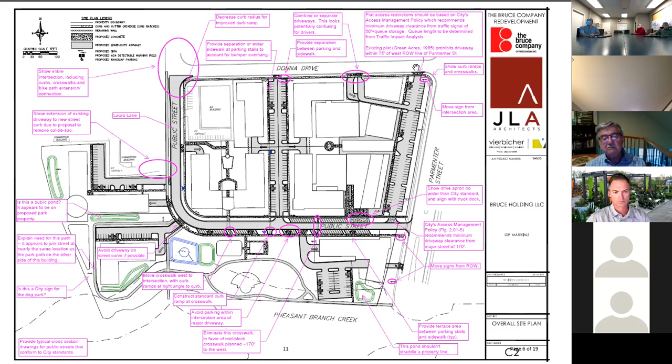It is a GDP. Only an SIP approval would guarantee them. So the only thing being approved is the density, the zoning, and the plat. It is not these level of details. So even if we show them, it doesn't mean they're guaranteed for the development, because you have another kick at the cat when we come up for the SIP.

Maybe I was misunderstanding earlier - I thought Seth said that it's critical that it be right here, wherever it is existing today is where they want to keep it. We wanted to confirm what your concern is, which is that it's drawn in the location shown, in the actual location. We do want to confirm that for you.

So I kind of feel like I'm hearing two things. I feel like I'm hearing we're going to put it where it is, regardless of whether it conforms to the platted access restriction, and we're not worried about that right now - let's push that down the road to the SIP. That is correct. Sean, for clarity, could you go up to the existing conditions drawing? That might show it.

That shows the point, yeah, it sure does, here, right? And on the next drawing, so here - yeah, we should get Vierbicher to correct that. That's a good catch, because it should be shown on the plans exactly where it is today.

Can you show side by side, Sean? Are you able to do that? I don't know that I can pull up two of them at the same time. I don't know either.

Well, we'll double check. As I said, we'll make sure that gets fixed on the drawing. Yeah, that's totally different. Yeah, different scale, but it looks different.

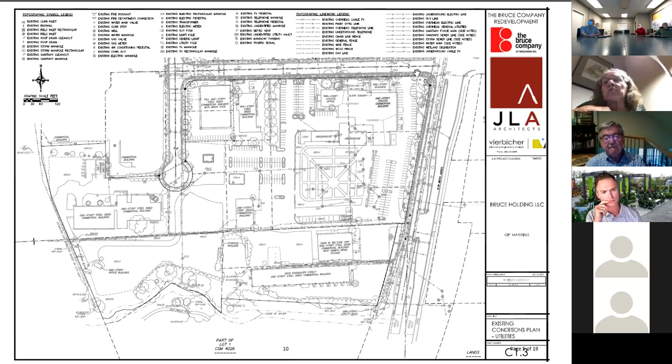That would make it even more problematic with my question - that would be problematic today if it were, as the scheme, the future plan is. Well, it's got to go back into that location you see right there where the hand is, which means the new drawing is not correct, we need to get that fixed, which affects the buildings, actually. Those are buildings there - the building shape will have to change.

Okay, and all I'm saying is, and it sounds like you're agreeing, good catch. The TIA is going to inform further what's the operational effect of this land use change without... Yes, yeah, so that's it. We'll get that fixed, that's a good catch.

All right, let's move on here, we still have a lot of ground to cover. So then I requested showing curb ramps and crosswalks, that kind of thing, just so we know where pedestrian connections are, near the sign intersection area. That'll take a later package, but I did want to bring it up now.

Can you go back to the other drawing, Sean, to see? Let's just - okay, you see the sign there? I think it's that dark bar, horizontal bar. It's difficult for me to tell. Right there, right there. I think that's it. Seth, is that it?

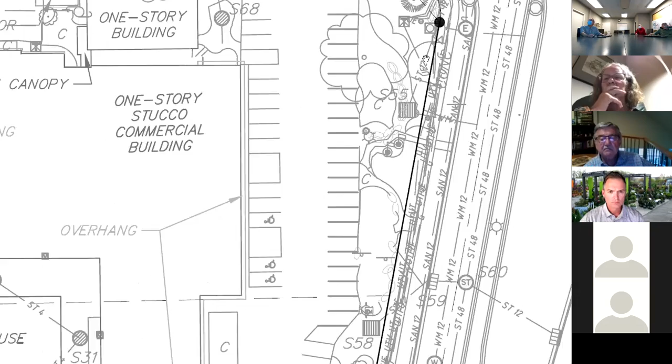Seth? Yeah, I'm trying to determine which one that consists of. I don't know, none of those look very sign-like. I think these are the pillars for the fence that goes around. Well, we should get the sign - why didn't they show the sign on the survey?

Well, Jake, let's make a note, let's get that on the survey, and make sure it's in the location that it is today. I think the main sign is here. Right, correct, the main sign is right where your hand is. So I want to make sure we determine what that other sign consists of, but our main sign is where your hand is.

Okay, and I think you've got the decorative fencing around this corner. Yeah, all right, we'll figure that out. Anyway, so the next one down, just kind of working clockwise, is to show a driveway apron no wider than city standard and to align it with the truck dock.

This looks to me like a truck dock over here. Yes, that is correct. So Sean, our question there for you is the trucks are going to be pulling east on that street, right? And then backing in at an angle, right? So how much apron are they allowed to have in order to back in at an angle? You kind of know what I mean?

Well, that's harder for me to say. I don't know what this truck dock use is. It seems a potential source of conflict to have someone backing out of an angled parking stall and a truck sliding in sideways and people using this driveway in this intersection, all within 150 feet. So I had some concern with, frankly, the width of this driveway looks really commercial/industrial. But if it's also a heavy pedestrian area, that's a pretty big conflict zone.

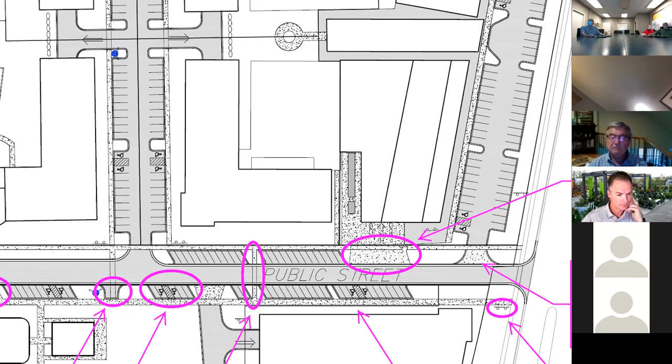I'm not here to say yes or no. I'm here to say this is a concern of staff and I recommend we don't do this. If somebody else recommends we do this, that's okay. Let me go back to, you're the engineer, so tell us what truck turning radius should be, the technical aspects, so we can get this correct. They have to have trucks accessing their building.

Does it have to be off this public street, this close to another driveway and an intersection and backup angle parking? Yes, because the store is right there. That's the store.

Remember, this is 12 months of negotiation with city staff. Various city staff were involved in this, and this was a compromise. The Bruce Company doesn't want this public street. They don't want this street at all.

Bruce Company has existing B3 zoning. So the alternative for the Bruce Company is simply to take the lots they have, sell off a lot on the Beltline for a 6-story motel. We could put a funeral dealership, a car dealership, a truck dealership, a funeral parlor here. These are all approved zoning. They could go pull a permit today and not have a public street.

They could put the Bruce Company building right on top of where the public street is shown right now. They don't want the public street. But as a compromise in negotiating with city staff over 12 months, everybody compromised and came up with this system that works.

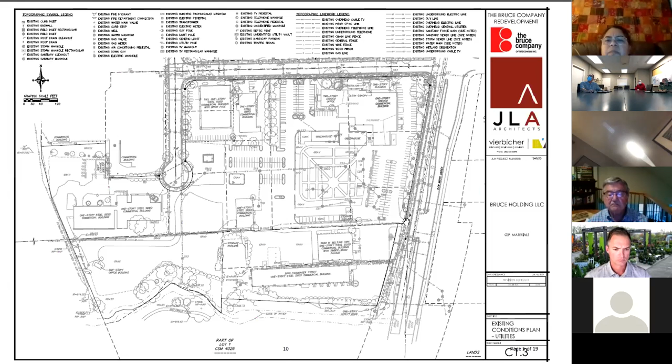This one doesn't freak me out, because I think if there's a queue stacked up here, these people are just trapped, but let's wait. The biggest issue you're going to face is people wanting to come in and make a really quick turn in here, but all they're going to be doing is slowing down, and frankly they should be slowing down anyway. So I'm not freaked out, I'm pointing out this is a policy question.

These signs should get moved from the right of way. If they're currently in the right of way, they shouldn't stay there. Okay, sure. We should have a terrace area between parking stalls and sidewalks in general, throughout that.

This pond shouldn't straddle a property line, so we should know if that's a public pond or a private pond. Well, this is the Latitude Graphics property that the city is trying to acquire right now. There'll then be a property swap between the city's Latitude Graphics property and the Sanford Square property to reconfigure the property line. So I wouldn't worry about property lines right now because those are going to change as soon as the city acquires Latitude Graphics, and then they'll get reconfigured based on a final approved plan with the city.

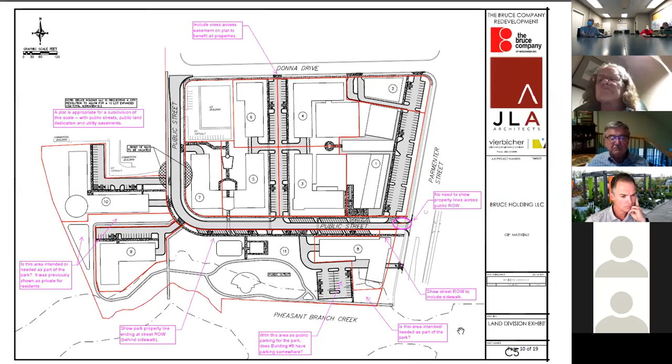Okay, that's good to know. I think I was looking at a different drawing where this made me think maybe it's a park and maybe it's a private lot, but it's the same lot. Go back to the park drawing with the red lines.

Okay, right there. So this was simply conceptual, to get a rough idea of how much parkland. But I wouldn't take that red line as the property line - it's a good point you've made. The red line would meander right between the building and the pond. But this exhibit was for a different purpose; it was not exhibiting the property lines per se. We'll make a note of that and get that drawn out.

I see, yeah, that's a good point. I had the mistaken impression this was attempting to show the public park. In terms of acreage, once the Latitude Graphics property gets acquired by the city, there'll be a discussion about what the city wants to do in terms of the property line. We don't control where that red line is shown right now - we don't have control of that. This was purely conceptual, just to show the overall big picture if the city acquires the Latitude Graphics site. Our submittal, the legal description, does not include that area you're talking about.

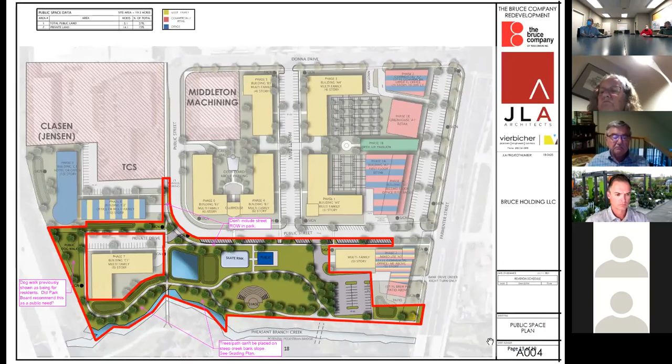Okay, the park acreage is how big - 3 acres? Is that what I read? The park is 5.2 acres. Oh, I thought it's - yeah, I'll just say, this is Robert, that's pretty fictional.

There's a lot of stuff thrown in there - what appears to be all the stormwater management of the buildings is shown in this area, so that's not parkland. I would hesitate to guess that if you keep all the stormwater management tools in this area, your parkland is reduced to about 2.5 acres, less than 3, I would think.

And that's for 880 housing units in this project, plus the 700-room hotel, plus that park would be utilized by people in new developments to the west and north of the Bruce Company, and I assume kitty corner to it on Donna Drive and the Beltline across from Culver's, where there's a big new apartment building going up. Also, there's no parkland over there. I mean, it seems to me - maybe this is beyond the purview of the Public Works Committee - but it seems to me that it's pretty light on parkland and open space.

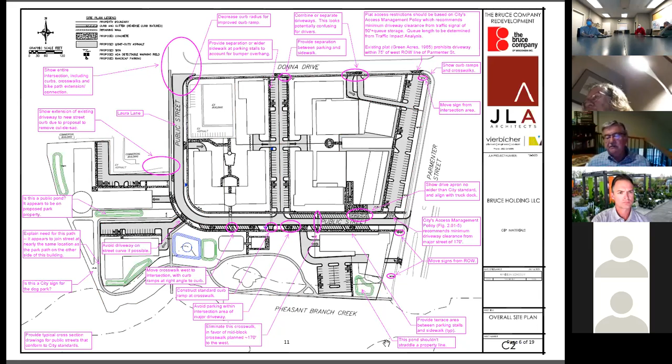Again, the parkland is going over and above what the city's original goal is. Number one, the stormwater pond is not needed by the Bruce Company. This Bruce Company site is Zone B3 - they can pull a permit right now for development. They have almost no permeable area; almost their entire site is impervious.

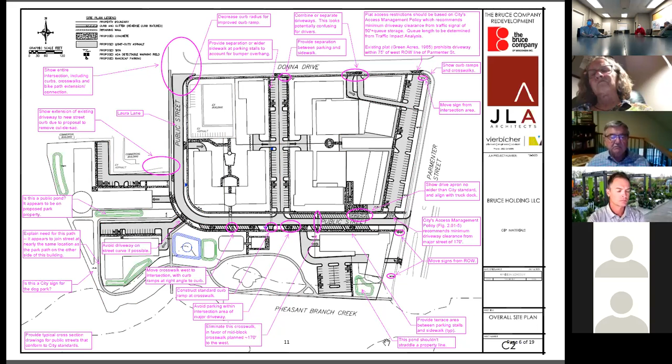So a new development that is being proposed actually creates less impervious area. The requirement would be if you increase impervious area, you would have to create a stormwater pond. So this pond is not required. What we're proposing, again, is going above and beyond the call of duty to create a pond that's shared with the city. It does serve a regional purpose as well as detaining some water from the Bruce Company's proposed development. But again, the impervious area requirement is such that they don't need to build a pond.

So there's also parkland, and lots of parkland has ponds in it. Just because there's a pond doesn't mean you deduct that from the parkland. But the city has made it pretty clear that if you don't need these ponds, get rid of them. They're basically stormwater retention areas, and we don't allow private stormwater retention areas counted as parkland. What we'd do is carve out an area around it up to the street, which means it can't be counted as parkland.

Okay, we'll get rid of it. The 5.12 acres listed is somewhat fanciful, because it's like double counting - you get credit for this as parkland, but you're also using half of this space for stormwater. We just want to make sure that as we're looking at both GIP and SIP considerations, we're all talking about the same thing, because it's not good for you or us to have big surprises later on. I want to make sure we're not making assumptions now that are woefully inaccurate.

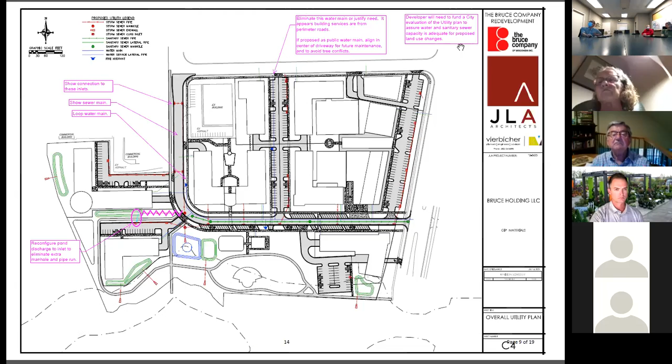Yeah, we didn't check with Vierbicher on that. It didn't look like any buildings were proposing to take their service from it, so I just wasn't sure why it's there.

And then, well, one of my recommendations in general is for the developer to fund a city evaluation of the water and sewer capacities to make sure that we can support this land use.

Yeah, so we're fine doing that, Sean, but we want Vierbicher to do it. We are not going to allow Strand to do this stuff. They charge triple, and I'm not exaggerating.

They triple their fees when a private developer is involved. They take advantage of us. They take twice as long, and they don't follow DNR standards under the statute. So I have a real problem with Strand and a no-bid contract being given to them.

So you either can bid it out, or we can have Vierbicher do it, and you can review it. Well, as you know, Strand has our water modeling, and while they could certainly share that, it gets us back to the old model.

And you and I have both been through the old model, where you can hire Vierbicher to produce a report, but then you also need to hire a city's review agent to make sure that we have an independent city-led review of your consultant's work.

And that's fine. And the city should get some competing bids or something, because Strand is taking advantage of the situation. And we have spent way too much money with them, triple what every other engineer has said it would cost. And we've gotten quotes on other work that we've had done that we've had to go through Strand. And it's not right that they're doing this.

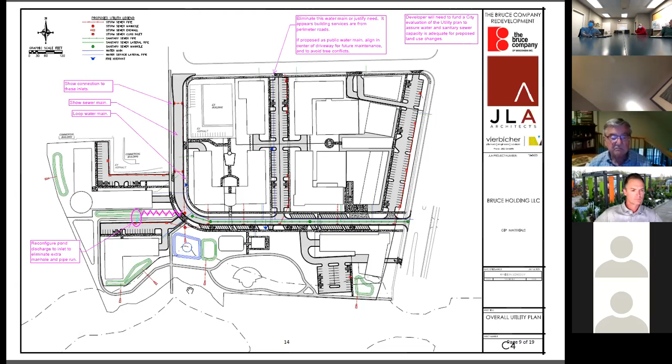I just wanted to make sure, because we're talking about removing some of those features, and that's going to change some of the engineering underneath the ground. Yep, exactly. Thank you.

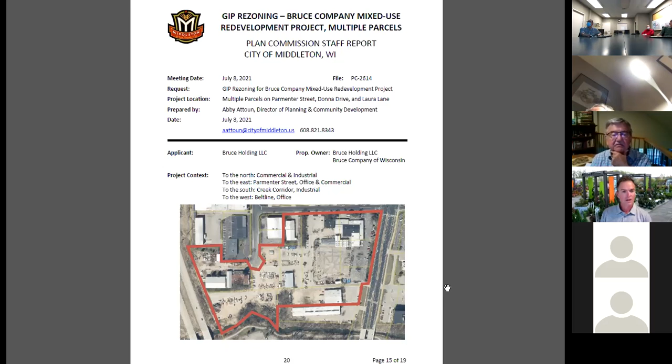So with that brief summary, that took just over an hour. I think the big question for me is which of those staff review recommendations does the committee endorse? Would the committee like to see anything struck, edited, or added to, for starters?

I think the key was removing stormwater detention ponds. So yeah, removing those from parkland is very important.

Okay, well that might get into Water Resources Management Commission's consideration too. I don't know what the stormwater management plan is. I heard Terrence say they're not necessary, but it'd be piped. I'd feel more comfortable if the Water Resources Management Commission considered that more fully.

Right, well I think the thing to keep in mind, and it depends on which committee it's at, but if it's going to council, we do not want stormwater ponds in city parks, new city parks.

Well, I thought one of the recommendations was going to be to remove all of the detail regarding the parkland and just leave it as parkland, leaving it up to the city to decide how they wanted to configure the parkland. Wasn't that your earlier suggestion, Susan? Yes, that is, but we still don't want the developer having to put stormwater ponds on parkland.

Well, that's fine. Okay, so I'll add to the committee recommendations, two notes. I'm hearing consensus to not show stormwater ponds on public park, and even though it'll overlap, remove all detail elements from the city parkland. Correct, I think that's it. Okay.

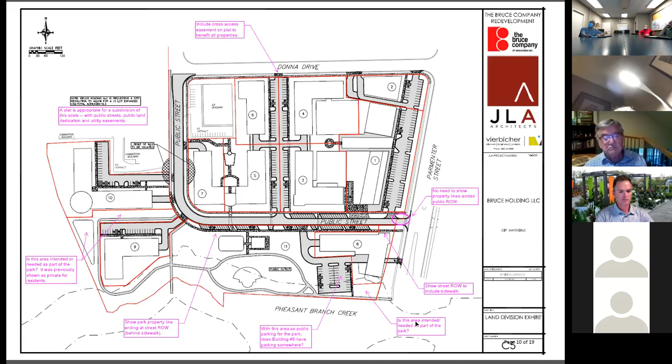So either the south part of that parking lot has to move upward, or the city has to agree that the parking lot can move into the environmental corridor. I don't know if there's a specific note there, just that the city should consider not allowing buildings and parking lots in an environmental corridor.

They might, yeah, fine. So that's on the Latitude Graphics property. Parking lots are allowed in the environmental corridor, buildings are not. But we can pull that back from the environmental corridor.

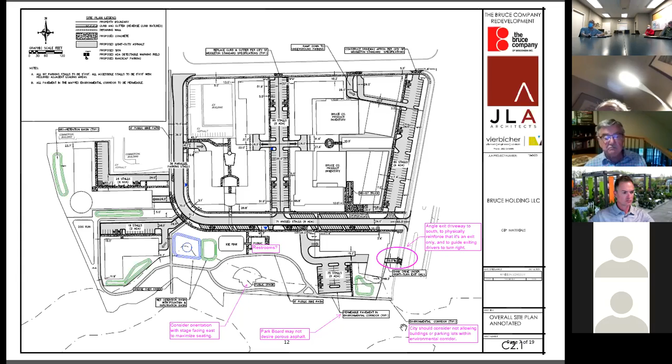Well, we're not going to show any detail in that park area, so we'll just pull that off altogether. Are you pulling the entire parking lot out from that area? Parkland, yes, yeah, we'll just take that off. You can determine what it wants to do with it. Sure, we'll take it off.

Thank you, appreciate it, Terrence. Yeah.

So, as you're taking detail off and moving the right of way over to the street, this lot is going to need some frontage too, it occurred to me. On the public—yeah, no problem. Yes, yeah, that's a good catch.

So I added a couple notes there. Are there any notes you want deleted or edited? Any changes you wish to make in any of these notes?

I think we had consensus, or should have consensus, about the water and sewer utility planning study being done. Conceptually we can argue about who's going to do it later, but conceptually I certainly think that ought to be something we make a recommendation on.

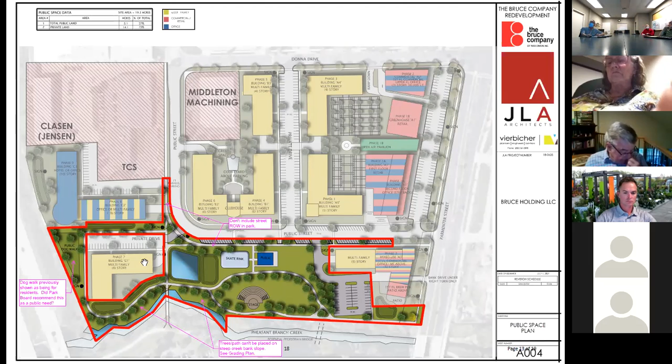Yes, I know you commented on it. Did you actually circle the angled parking right at that intersection in the center of everything on one of the drawings? Basically some of that, I know we talked about it. I just didn't know if there was a note there to avoid parking. No, there isn't. Yeah, okay, we'll get rid of that.

Okay, then yeah, I don't think I have any other things that I need to ask about. Any other committee members have questions, comments, or points to make with respect to the engineering comments here? No, I'm fine with the comments.

I have a question here. These buildings in the front, right near the retail store, where the truck route has access—that's a two-way street, right? Yes, this public street is two-way. Okay. And Sean, I think Terrence already asked you this, but is there some mandate on what it has to be? Because to me it seems odd for a truck to back up onto a two-way street.

Especially given the number of apartments and other commercial properties which could have a lot of traffic coming in and out. Maybe apartment residents go to work at 9, but if there are other businesses there or a hotel, their traffic timings may not necessarily be the same. That's going to be a very troublesome point, I think, that maybe the traffic impact analysis can shed more light on, but having semis back up that street to make a right angle turn into the loading dock is going to be difficult at best, I would think.

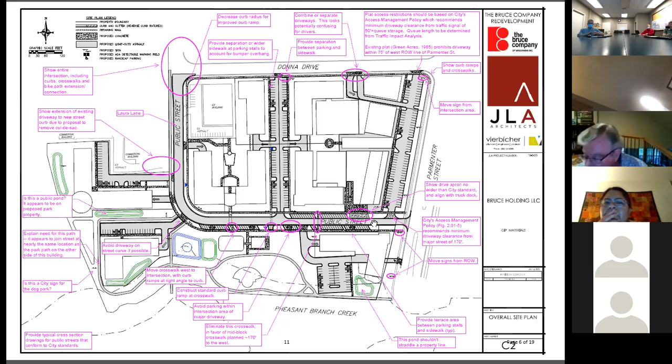The truck aligns with our store hours of operation. So we always communicate that with them. It wouldn't be earlier, it'd be aligned with the store operations because that's when we employ accordingly. So there'd be deliveries on weekends as well, if it aligns with the store's operational hours.

I appreciate the clarity on that. It's very rare that we actually receive shipments on the weekends because most of the haulers don't align for that. We really discourage from that because that's usually our busier days. So we rarely receive, and we actually make it a policy - very rarely will we make an exception for weekends just because we don't want to disrupt the customer experience and the distraction. So we try to put all staff on the floor versus during the week. So rarely is it weekends.

So Seth, would it be okay to say something like the store could limit it so that there's no semis coming in from like 7:30 a.m. to 9 a.m. when the apartment traffic is exiting? Would that be something that would be reasonable because your store doesn't open till 10 anyway? That is reasonable actually for us to talk through a little bit further. We probably could align with that because that is fairly consistent currently.

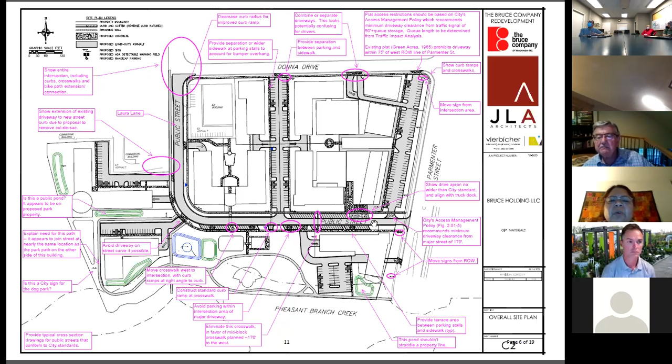All right, committee member, any other comments? I know Gayatri had another point. Yeah, Gayatri? I'm not sure exactly where the hotel or apartments would be located, but apart from this dog park, are there other areas for pet relief within the Donna Drive block? Because if there is no green area and there are so many apartments, unless you're making the whole apartment not pet friendly...

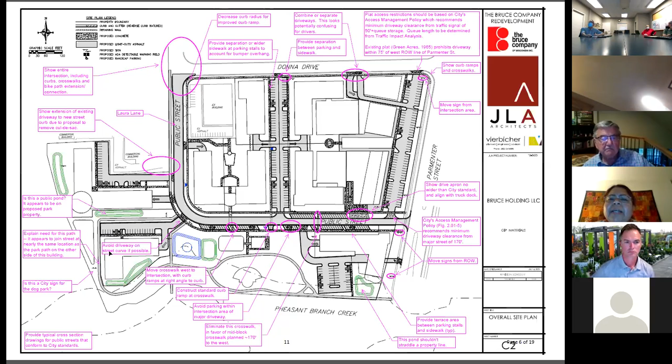So what typically is done is there's a limit on the number of total units that allow dogs. Typically it can be 25%, very typical. I'm not saying it is here, but you don't want your whole building to be 100% pet-allowed - it would be too burdensome on the landscaping. But there's a lot of other green space here, internal and along the front of that private street, for them to be able to walk dogs as well.

Along the private street, you said? This parking lot here? Yes. That's just this strip of grass between phase 3 and phase 1 building, right? Yes, but also along the outside perimeter of the buildings as well. And then you've got the dog park, you can go into the conservancy if you want, et cetera. But as far as dog relief, I think really you're talking about close proximity to the buildings, right?

Yeah, well this is Wisconsin. People are not necessarily always going to be walking their dogs to the conservancy or the dog park half a mile away, especially in the middle of the night. So it's all about the convenience. We see it happen all the time. And given the commercial buildings and other places there, combined with the residential, as you said, it could be a landscaping issue.

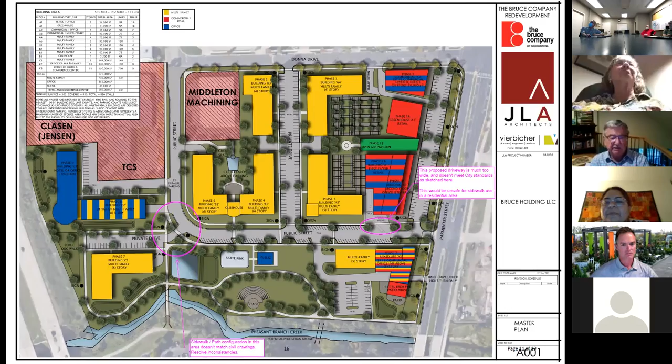This is going to be a rather difficult motion for someone to make to try to encapsulate all of the points that we've discussed in one motion. Do you need someone to try to do that, or can you do it based on our earlier comments and the notes that you have taken?

Yeah, well, so I'm suggesting that you endorse the staff recommendations. I didn't hear any edits or direction to remove staff recommendations, but to add two that I wrote down, which are don't show storm ponds on public park property and remove all detail elements from public park property. Correct. So we'll add those in.

And then also to add on to the Plan Commission's five recommendations for contingencies, add on three other recommendations for contingencies, which also are in the plan comments, but they're not really plan elements, which are enumerated here for city approval of cross sections conforming to city standards, completion of a city study funded by the developer of the water and sewer systems, and that the plat should include also access restrictions consistent with the city's access management policy.

And if further consideration of new information shows that that's not appropriate, we can change that, or if the committee wants to change that right now, they may do so. I don't know what it means until the TIA is done.